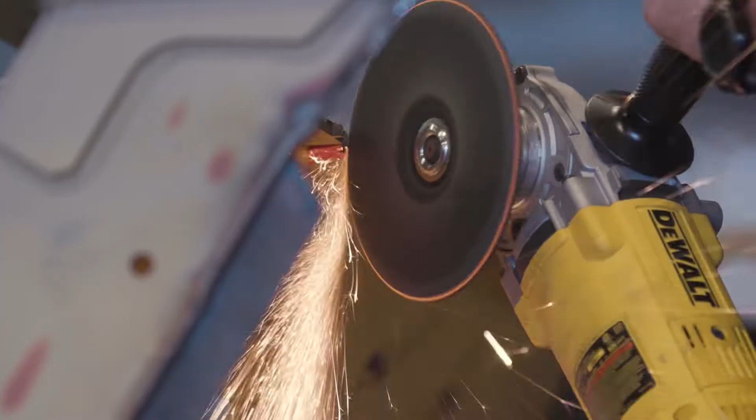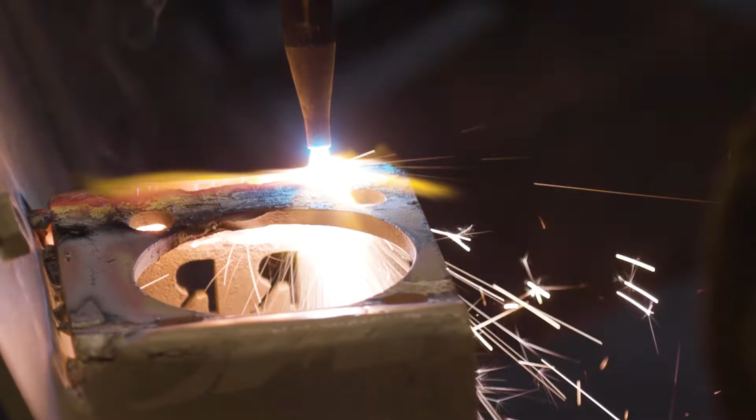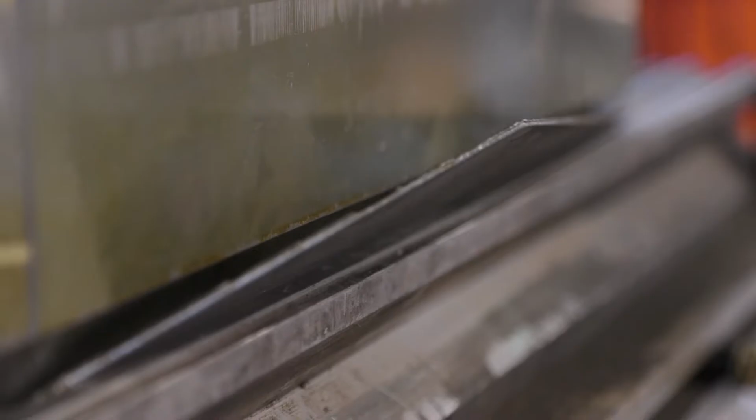DES is an engineering company formed to provide fast and flexible engineering resources for mechanical and electrical engineering, design engineering, test, and validation—for ground vehicles, tracked vehicles, commercial armored vehicles for agencies, and hardware solutions for the DoD and the military branches.

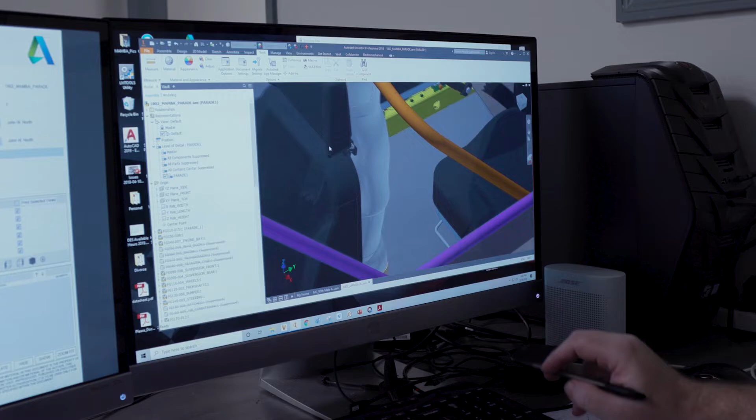A large defense contractor might get a new project but not have the engineering to handle it because their engineers are focused on their primary mission. So they'll call us up, and we'll start the engineering, figure out the data pack, figure out what they need to do, and help them roll all these designs into production. We do a little bit of everything, and that's what we like to do. We're technically focused and very technically strong.

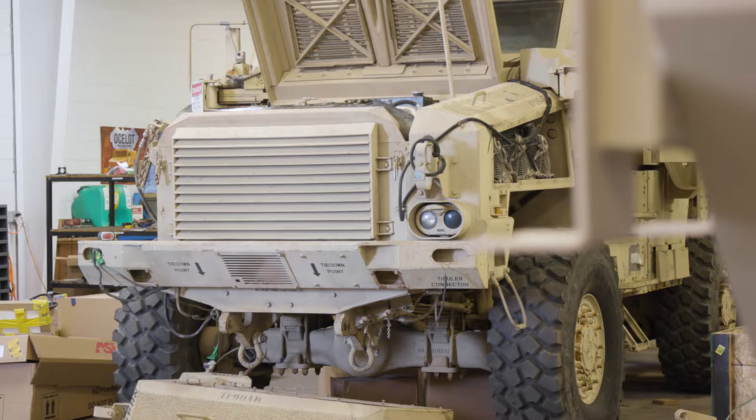There are a couple different ways the government approaches industry when they have a problem to solve. Sometimes the government develops a set of requirements and publishes them to industry to gauge interest and see what people's capabilities might be. Other times the government doesn't have a set of requirements developed very well, so they go to industry to elicit ideas, concepts, and solutions that industry may have already developed or started.

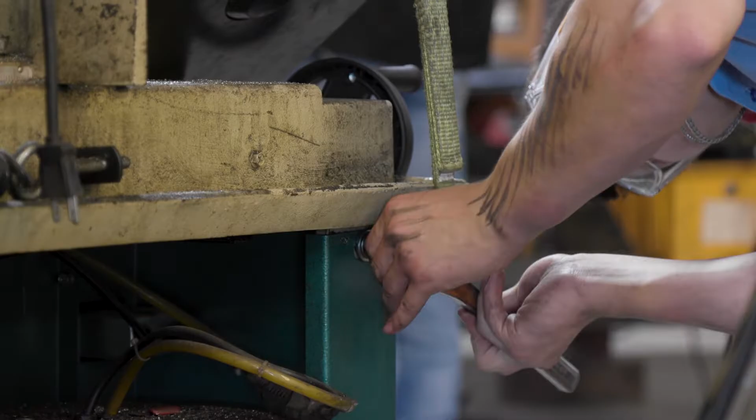We feel like that's our value proposition. We don't need to be fed a long line of instructions. We're going to help our customer figure out what they need, give them the kit they need to do their mission, help them develop their requirement, and then give them a product at the end of high value. We tend to be on budget, ahead of schedule—that's our modus operandi. We like to be on that cutting edge, helping people move forward.

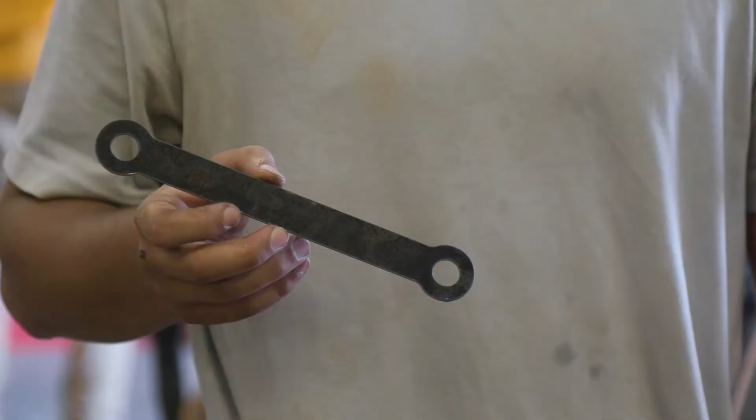At DES, we look at everything we do as an individual project, so we employ the standards of project management to make sure they are run smoothly and can be done on budget and on schedule.

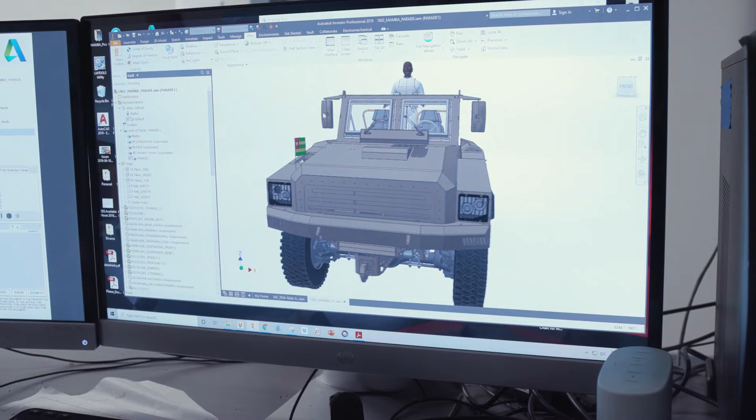First it's a brainstorming session—let's be honest, because they don't even really know what they need or want. We'll come up with a lot of concepts. With our engineers, we'll come up with computer aided design concepts, share that with the government, our customer, and users, and get their feedback on what kind of kit or product they really want.

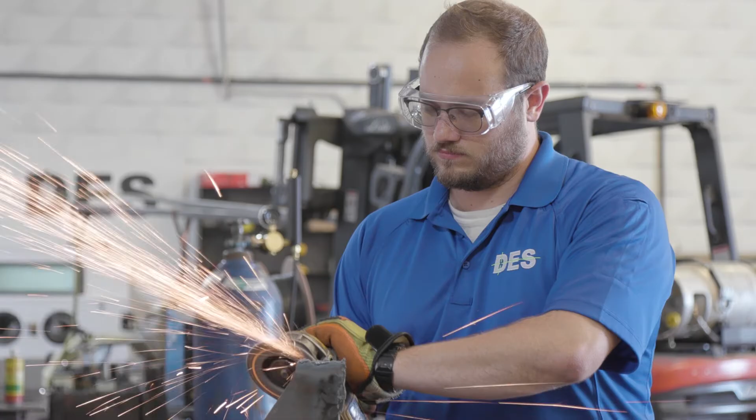After that, we'll develop the technical data pack and drawings so our shop can make the parts. Our engineers and the shop work very closely together—we feel like that's the highest value. The shop can learn from the engineers, the engineers can learn from the shop, and we can make a better product.

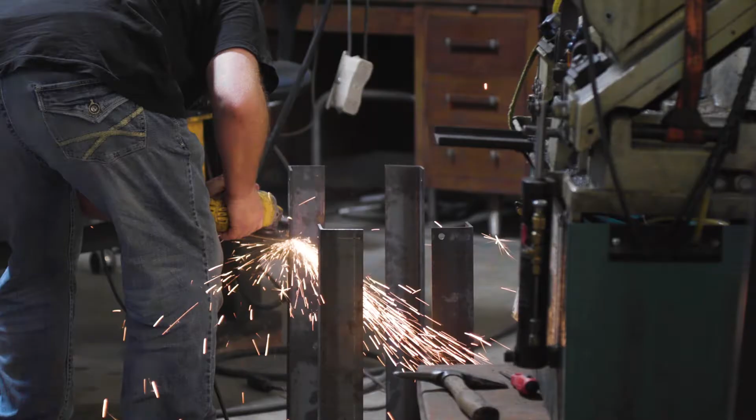So we'll build a prototype and test it out, making sure it has high reliability and high durability. Then we'll build the final product and deliver it to our customer.

We watch the project very closely on time, budget, resources, and technical concerns, all the way to the end when we deliver the project and close out with the customer, making sure they were satisfied and that there are no loose ends and that the contract can be closed in their books and in ours.

One of our favorite projects has been the Army's new M917A3 dump truck, also known as the Heavy Dump Truck, or HDT. We helped Mack Defense, who ultimately won that contract, write the proposal back in 2017. Mack Defense went on to win the program, and we helped them with engineering and designing the armored cab for that vehicle, along with a bunch of other miscellaneous design tasks. We continue to support that program as it goes into production now, having just passed all of its tests with the Army.

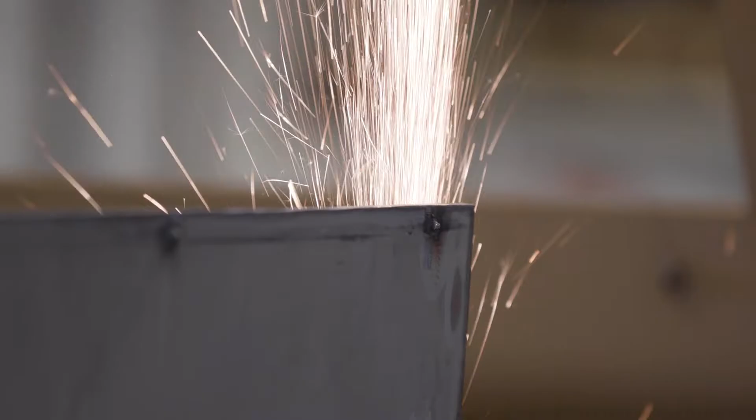There are 26 of us total. Every single person either has an engineering degree or a technical skill, like a welder or fabricator. We do not have a lot of overhead positions, so even our program managers are degreed engineers. Greg and I, the owners of the company, are degreed engineers. The guys in the shop are super highly skilled labor—they can machine, weld, and make things happen even with very little direction.

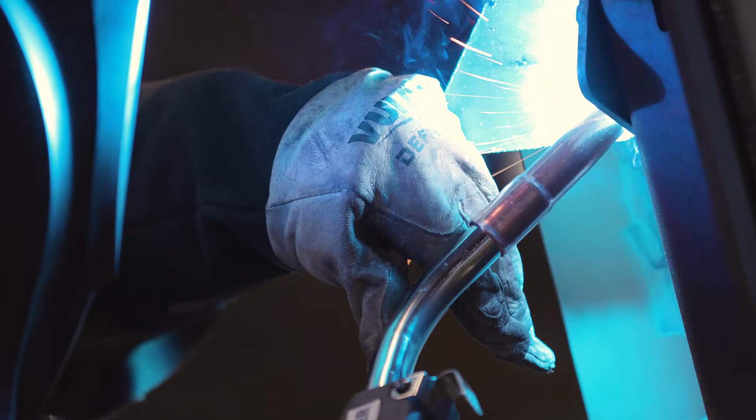I think what's key for our team is being self-motivated and really getting down in the weeds to figure things out. We like to think of ourselves as having a rugby team mentality, where every player can do every job and play every position. Sometimes folks lead a project and sometimes they're just helping out, but we try really hard to work as a team constantly throughout.

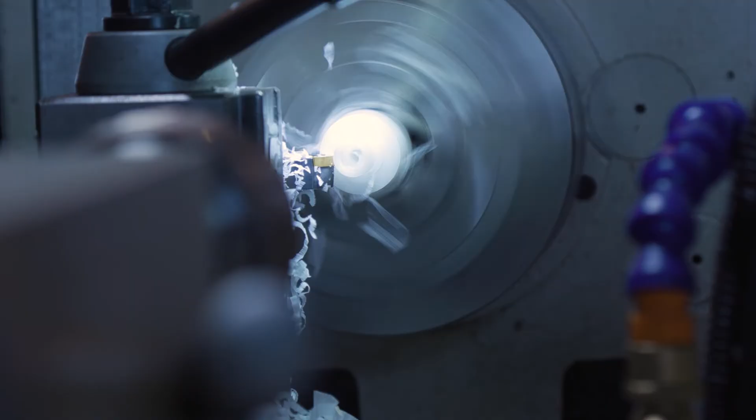North Charleston has honestly just been a godsend on so many levels. The entire team, North Charleston and at the state level, has been very hands-on, helping and guiding us with tax questions, IT security, land lease options—really helpful, especially for a small business like us.

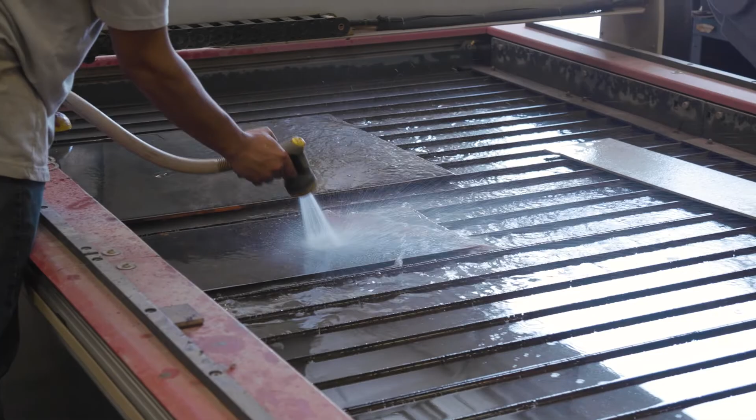The future of DES is that we will continue to grow, add capabilities, and add people to increase our offering to the market space and be able to do bigger projects. We want to continue to invest in our people, higher education, and continuing to get good students coming out of local colleges, giving them a place to come work, develop, and grow technically.

Our most valuable asset is all of our people. We have an amazing team, and we feel very blessed with that.

That future state is just growing that team bigger, doubling it in size, but keeping the same mindset, the same culture, the same teamwork. As we do that, we're going to continue to provide value to the government, to our customers, and continue to get more work.

We think that our best commercials and our best business development is doing good work and delivering on time and on budget.